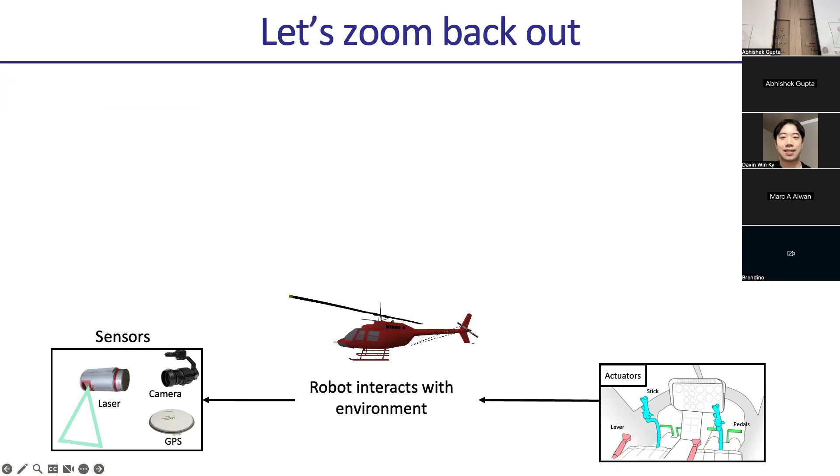Okay, so if you go back to our lecture 2, right? We want a robot that interacts with the environment to go from sensors to actuators. We had this loop where we had a world model. State estimation tells you where you are, so it goes into your world model. And then you have planning, which tells you a good global path. And you have control, which tells you how to follow the path. And so we went kind of topsy-turvy, we did state estimation, we did control, but now we're going to do planning.

Okay? And so planning, as opposed to control, is really about finding a global path through the space. So if you're a helicopter, it tells you the path you need to follow to get to your target, but it doesn't tell you the lowest level controls. That's what controls do. Right? And so controls assume that you have a path. Planning gives you that path. Okay? And so we're going to focus on planning for the next few lectures.

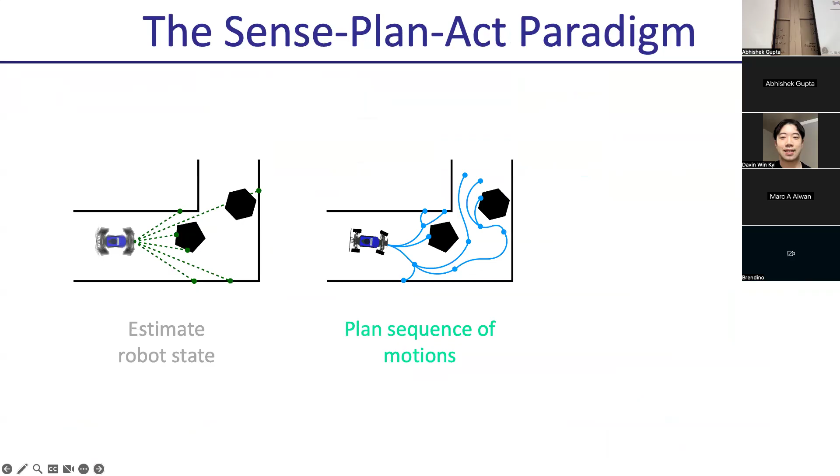And so planning kind of fits nicely into the sense-plan-act paradigm. You have sensing, which tells you where you are. You have planning, which tells you how to avoid your obstacles. Often planning is about avoiding obstacles while minimizing costs. And then control kind of keeps you on track. So control is really about stabilization. Planning is really about finding a collision-free path through high-dimensional space. And state estimation is about managing uncertainty. Okay? And so we talked about state estimation, we talked about control, and now we're going to talk about planning.

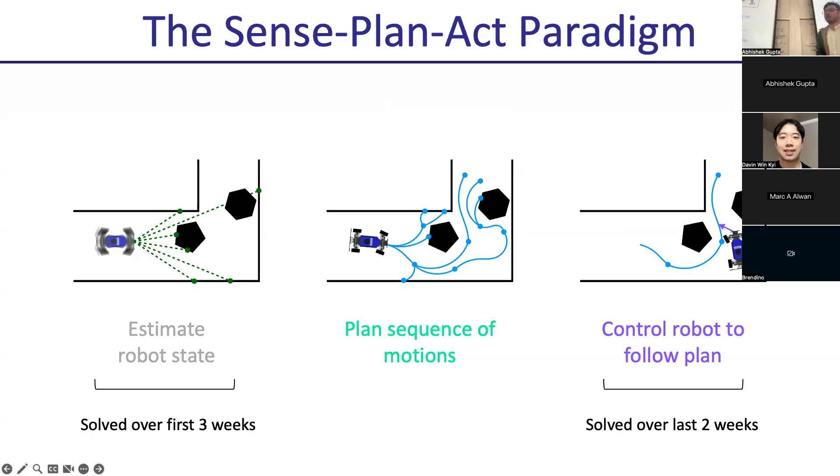Okay. So let's think about this example of flying from Seattle to LA. If I'm going to fly from Seattle to LA, I'm going to start by getting to the terminal, boarding an airplane, getting off the airplane, taking an Uber or whatever, right? But then I'm going to break those down into smaller steps, right? So I'm going to plan getting to the terminal as getting onto the I-5 and then driving down and then getting off on the exit and so on. And similarly, you want to plan your route in the airport, plan your route once you're off the plane. Right?

So there's different levels of planning that you do. The highest level planning is in terms of task planning. I want to get to the airport. I want to get on my flight, get off the flight. Then within each of those steps, you kind of break it down into smaller parts.

And then you kind of keep breaking those down further and further until you finally start asking the question, how do I actually take the first step of this, which is getting out of my house? And so in planning terms, this is like a hierarchical planning scheme. So you have a highest level plan, and then you break that down into smaller and smaller steps until you're planning about motion.

So I'm thinking about, how do I get out of my house? It's like, how do I move my joints and limbs until me as a human is able to get out of my house? And so I'd argue that the top few layers are kind of what you call task planning, and the bottom layer is really what you call motion planning. So it's like, how do you plan your motion to get you and your suitcase out of the house while avoiding colliding with random stuff?

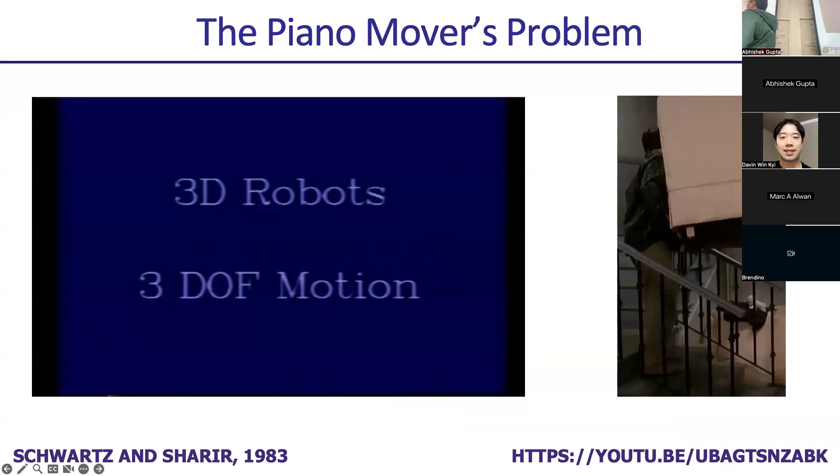This motion planning is often called the piano movers problem. Here's an example from the 80s. You can see this is like a maze kind of thing where you're trying to extract an object from somewhere. What they're trying to do is place furniture inside a room, but you can only translate and rotate the furniture, and you cannot collide with anything else.

And so the problem is hard because you can't teleport, you can't fly over the objects. You have to consider their collisions with things, and account for that while planning. For instance, some things might be too tight to get through, so you have to plan for how they collide with other objects. As the number of objects and number of degrees of freedom goes up, that gets harder and harder. This is the simplest motion planning example, and then it gets harder and harder.

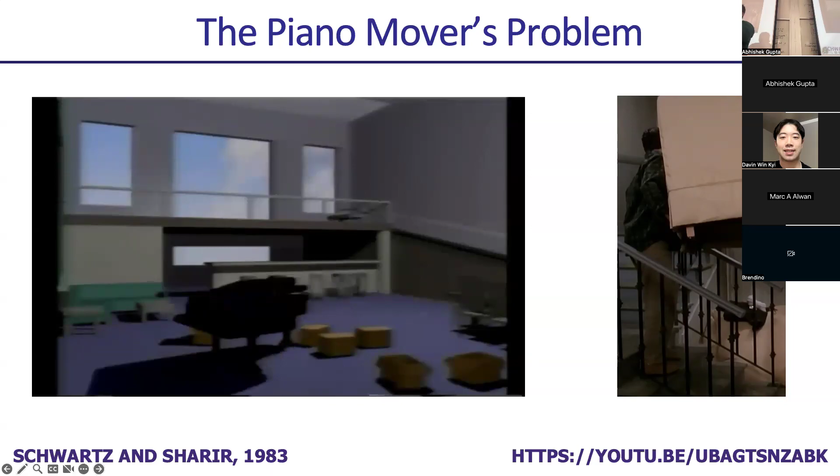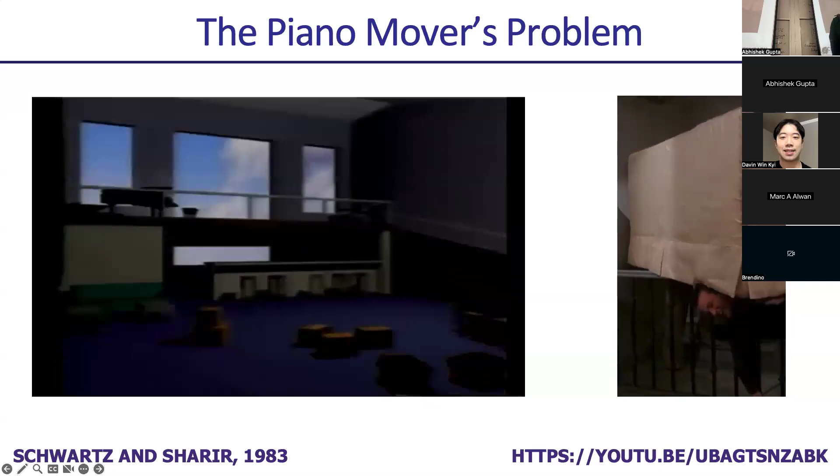You can show that it's harder than, what you call, PSPACE-hard, which is harder than NP, extremely hard. Also shown in Friends. I don't know if any of you watch Friends, but there's this scene where Ross is pivoting his sofa up the stairs, and that's essentially the piano movers problem in action. And I thought that was cool.

But basically, most motion planning problems are generalizations of this piano moving problem, where you're trying to navigate through free space with a constrained system while not colliding with anything, right? So you have to account for the constraints of your system. You can't teleport, you can't fly, but you have to avoid collisions with things in a really tight constrained space. Okay. And the piano mover problem seems easy, right?

But when you go to problems that you actually care about, like this is a Honda humanoid, this is one on the International Space Station, right? You're trying to plan motion to, for instance, pick up a table or plan motion to get through space while holding onto a guardrail with a really high degree of freedom system. You have to do it fast enough and on low compute systems, and that becomes really hard, right? And so,

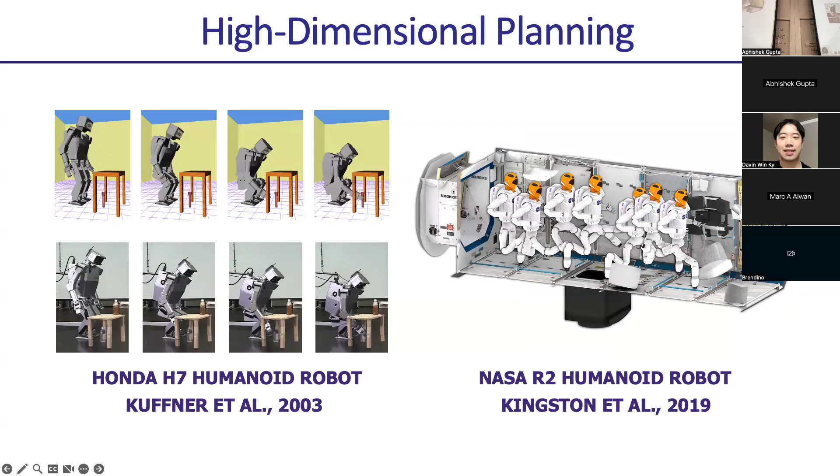If you look at any of these systems in space, they're not running NVIDIA GPUs, right? They're running Pentium 3s or 4s or whatever. And so you have to be compute efficient while dealing with really, really high dimensional systems and dealing with lots of constraints, right? If you didn't deal with the constraints, this robot would just fly off or it breaks up. Okay? And so you have to be highly reliable, pretty quick, and deal with high dimensional systems. And so this is kind of the general problem of motion planning.

If you ever see problems like this, with a bimanual arm, you'll see that the arms have to avoid each other. You're in a tight space, you have to avoid each other while moving fast and doing motion. So that's up on the right. We have whole body planning, which is up on the left, where you're trying to move the whole humanoid at once. And this is more conventional, most factories will deploy motion planning systems to get quickly from one point to another when there's obstacles in your system. Right? And so most motion planning problems that you consider are about getting from point A to point B while avoiding obstacles and obeying the constraints of your system. Right? Okay.

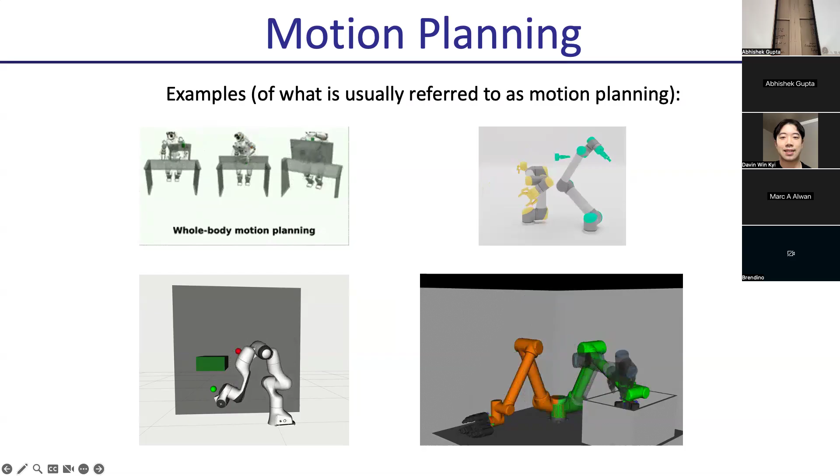What makes this even harder is when you go from these kinds of problems that you can compute offline. A lot of these problems you can compute offline. You compute a path to go from here to here. You execute the path with a controller. But what makes this harder is when you have to do real-time planning. You're a robot arm planning to move from point A to point B. Suddenly a human comes in your way. Your plan has to be different. You have to do that on the fly and you have to be safe, right? So any safe system needs you to be able to do real-time replanning. And that's what makes this problem really hard.

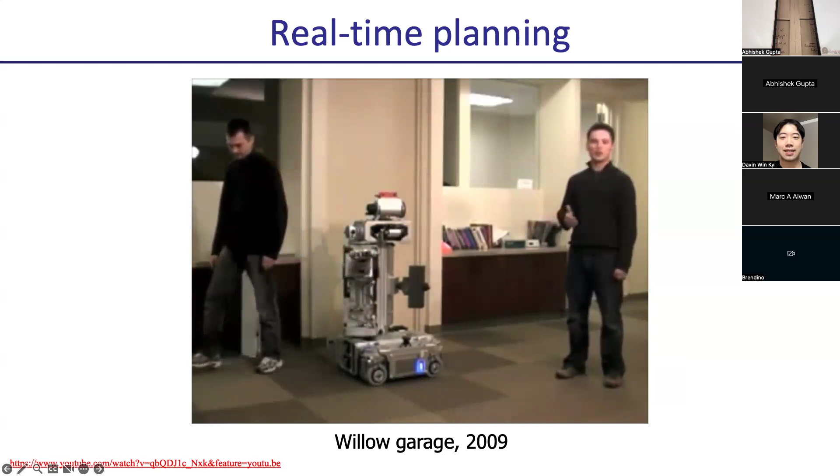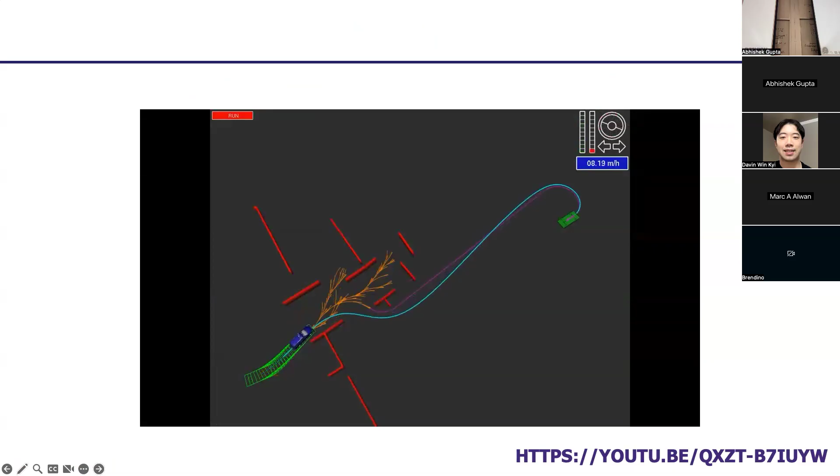This is an example from Willow Garage, which makes the PR1 and PR2 robot, but you can see that people will stick their hand in the middle and the robot has to get around. Another example is from autonomous driving systems where the map is not fully known. You're building the map on the fly, and as you're building the map, your plan changes. You realize that I can't go that way. I have to change my plan. And so you have to be able to really quickly incorporate new information into motion planning methods.

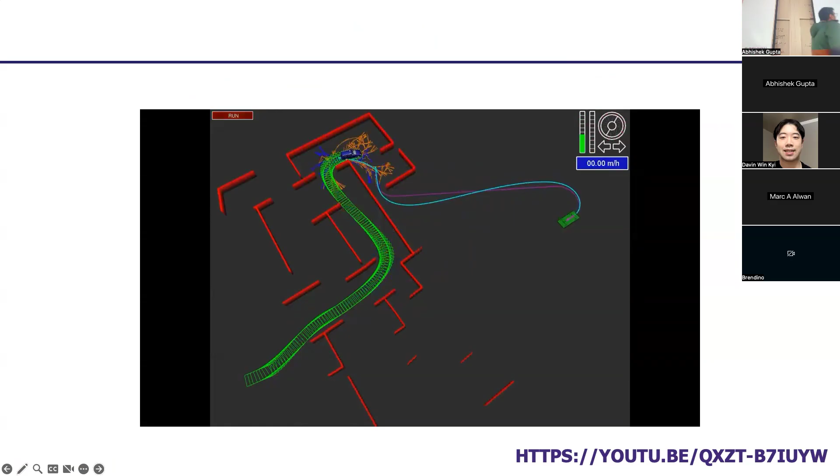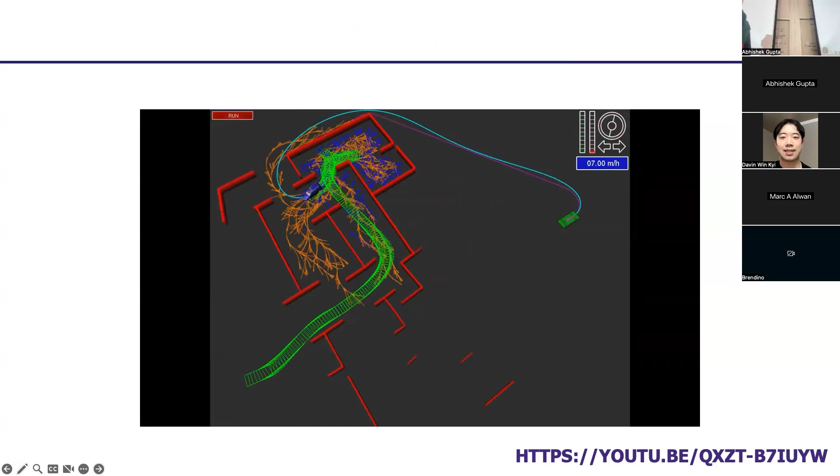As opposed to things like reinforcement learning, which you could take 50 hours to train offline, planning really has to be fast and really has to be real time, right? If you're driving a car around, you need to be able to make new decisions in real time or close to real time.

Okay. The other nice thing about motion planning methods is that they're often very universal, in the sense that there's a single algorithm that works across many systems. If you look at the state-of-the-art motion planning algorithms, some of them are very old. A lot of them are the same algorithm, just applied to different systems. You just change the model, but it's the same algorithm.

Whereas if you look at other fields, often you have per-problem solutions, and motion planning algorithms are beautiful because they're basically search methods that are scaled up to continuous spaces, but the same method works across lots and lots of different forms.

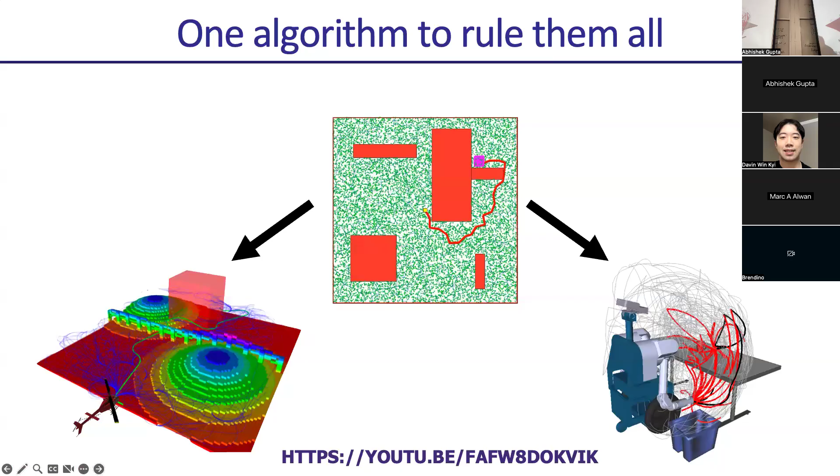Another nice thing is you can prove things about them. You can say that it's going to converge, or you can say that it's going to be this suboptimal, or you can say things like, there's these algorithms called anytime algorithms where you can show that they'll continue to get better over time, right? And so it's a really beautiful field of work.

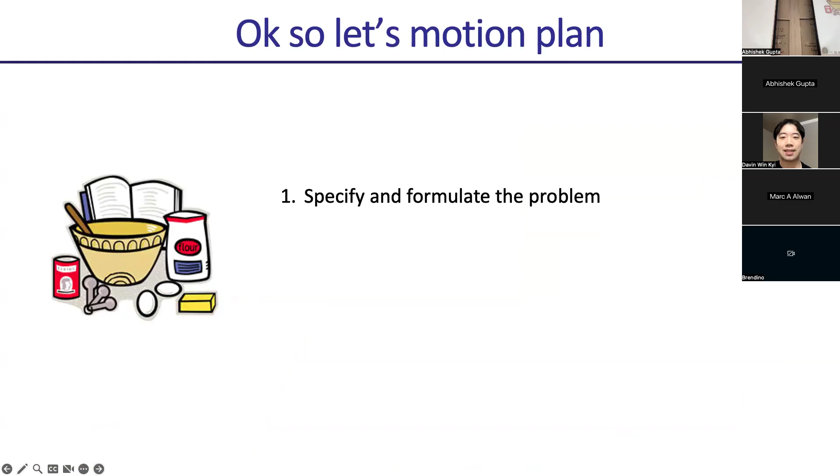Right? But we have to solve it, right? So we have to figure out how to motion plan. And so we're going to try to take this step by step. We'll start by specifying and formulating the problem. We'll then think about what makes this problem actually hard. Let's try to visualize the problem difficulty a bit more. And then let's try to think about solutions, right?

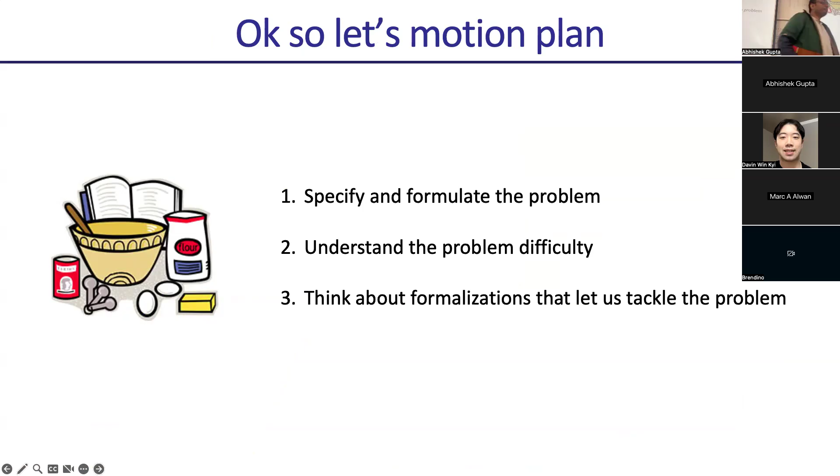So whenever I think of a research problem, I want to start by understanding what the problem is, understanding which cases make it hard, and then we can think about approximations that are tractable. Okay? And so that's going to be the structure of our lecture today. We'll start by formalizing what the problem is. We'll talk about what makes it hard, mostly through some visualizations and examples. And then we'll take a start at solving it. Okay, so let's start by specifying the problem.

Now, when we're specifying the problem, we need to specify a representation of our problem that can work across many different cases. So we said we wanted it to work for a humanoid, for an arm, for a snake robot, for a piano moving in space. You want a generalizable representation that we can use across lots of problems.

So for instance, you have a problem of a translating triangle, kind of like your piano. You have a problem with a 2D planar arm moving through space while avoiding obstacles. You have a problem like a race car, like you guys are doing, or a robot arm, like we have in the lab. And all of them have to have some shared formalism that we can use across them, right? They seem like super different systems. And so what we're going to try and do is define a formalism that we can use across all of these platforms.

And so the key idea we're going to talk about is something called the configuration space, often known as C, right? So the configuration space, or the C space, is a manifold that contains the set of different transformations that are achievable by a robot. Essentially what that means is, if you have a robot arm, the configuration space for that robot arm is the set of all joint positions that that robot arm can take. Or if it's a race car, it's going to be your X and Y and theta.

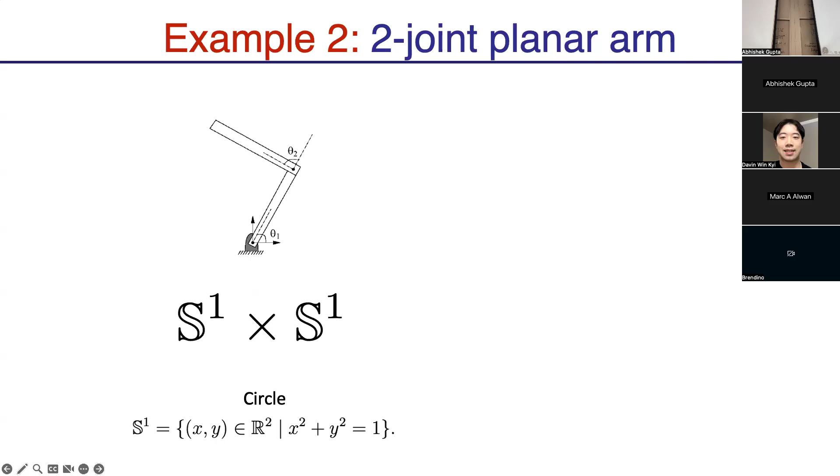Good question. But viewed graphically, you can think of it as a theta 1, theta 2 space, but it has wraparound. Right, because it's angles, it wraps around. And so it kind of looks more like a torus. Right, so you have theta 1 goes this way, and theta 2, for each theta 1, you can have a theta 2, which goes this way. If you want to visualize the configuration space here, it looks something like that.

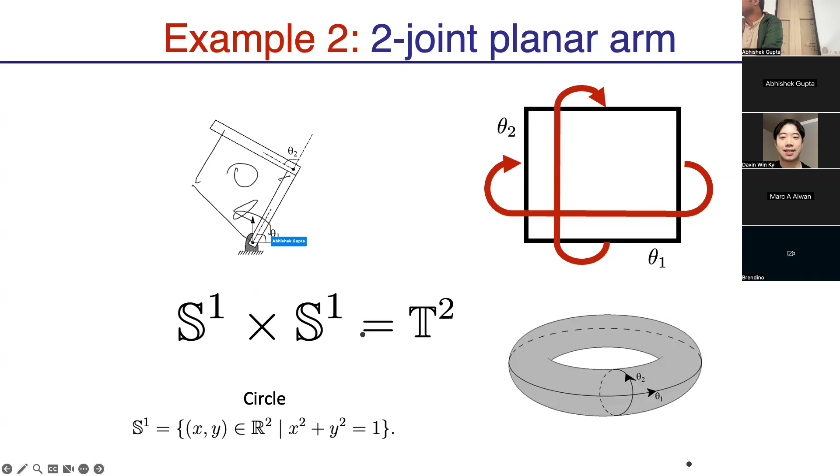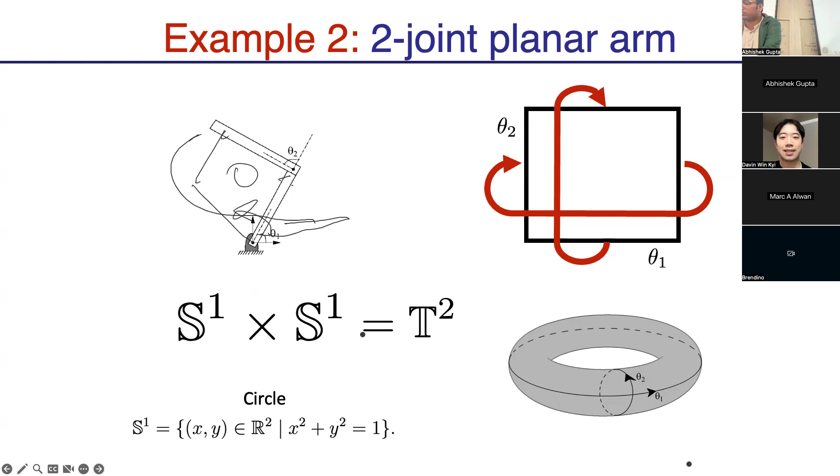And so what's going to make this tricky is when you have an obstacle sitting right there. So if I want to get to, for instance, this angle, I cannot just send my robot this way. It's going to hit the obstacle, right? And so what I have to do is move this thing over like this, and then get through and then flatten out. Yeah. So in order to do that, you would model what parts of the state would have the arm colliding. Exactly. And that's going to be tricky, right? So we'll talk about that.

The example that you guys care about is the race car, right? So in the race car, you have X, Y, theta. So you have X and Y, which is in R space, and S1, which is in your angle space. And so this is a group that you often call the special Euclidean group, or SE2, right? And so SE2 is going to be X, Y, theta in the plane. The car's not going to fly, and so it'll stay in the plane.

And so you can have a bunch of different robots. Each of them will have their own configuration space. But when we think of these planning algorithms, we're just going to generically operate on the configuration space under generic assumptions. And then you can instantiate them with each of these specific robots. So for instance, you might have a mobile robot translating, R2. A mobile robot translating and rotating like your race car, that's SE2. You can have a spacecraft which can move in 3D and have all sorts of rotations. That's SE3. So we don't have to go through these examples, but they're all just different instances of a configuration space.

Okay. Now, as Ruin was alluding to, the tricky part is when you have obstacles, and we're trying to find collision-free paths through space. And so the way that obstacles are specified, yes.

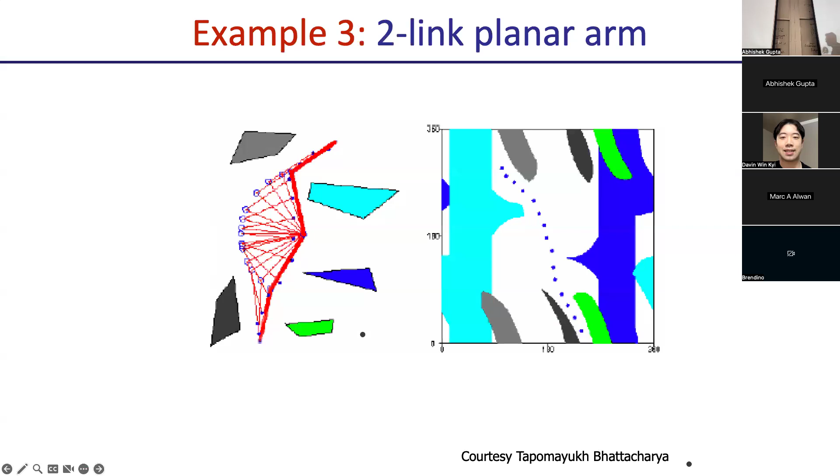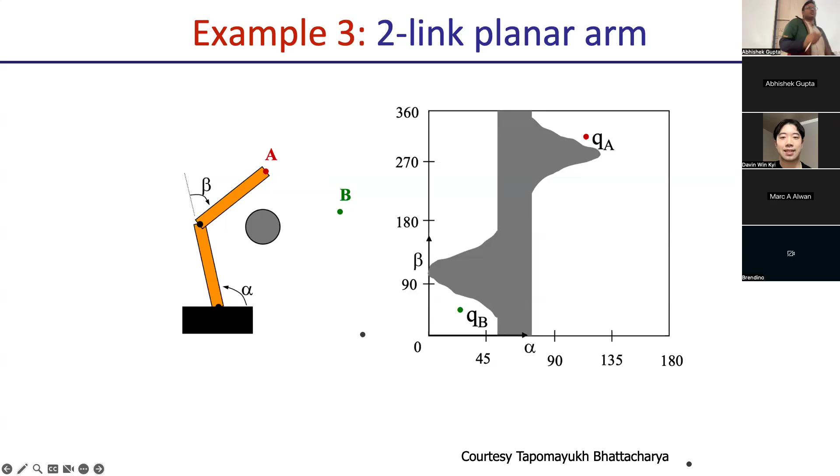Okay. So the general problem we're going to try and solve is defined something like this. We're going to say that we have a workspace, which is either R2 or R3. We have an obstacle region. It doesn't have to be a single region; it can be a collection of regions. We're going to have a robot, which is defined by some A function, which maps the configuration into an area. You're going to have the configuration space. You're going to have an initial configuration, let's call it QI. You're going to have a goal configuration.

Let's call it QG. And your goal in motion planning is to compute a continuous path through the free part of configuration space, where it starts at QI and gets to QG. And so you have to basically solve this search problem where you're trying to find a path that gets you from QI to QG while staying in the collision-free part of configuration space. That's the problem. And sometimes you'll have a cost, like you want to get there while saving fuel, or while obeying other constraints, but not always. Often you just try to find the shortest path.

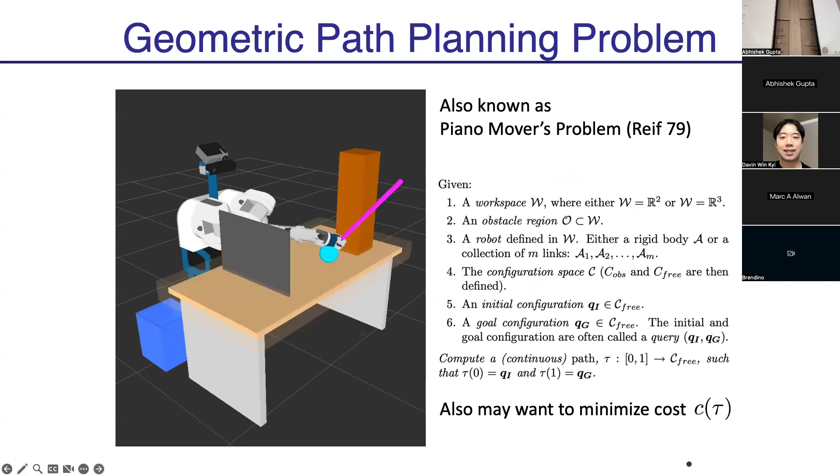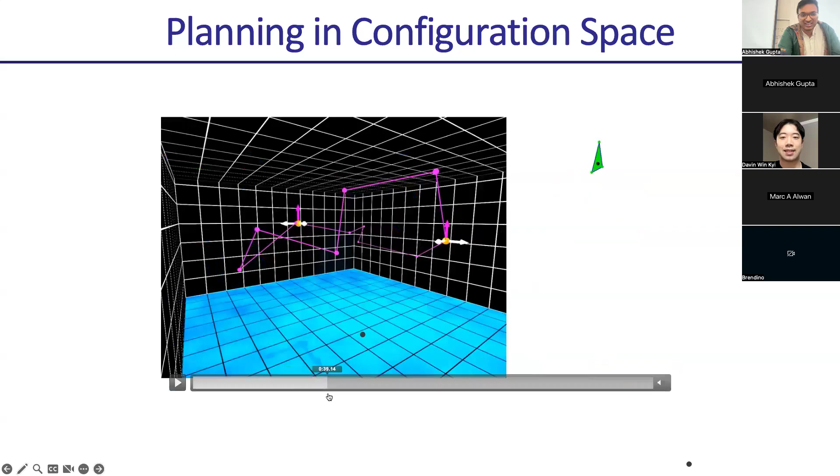So you can see that it's getting through space, navigating through this nasty non-convex space. It seems pretty simple, but when you start mapping these obstacles into the space, it becomes really, really nasty, even for a simple robot. And so if you look at the motion it has to plan, it can't magically go through things. It has to move and adjust and move and adjust and move and adjust.

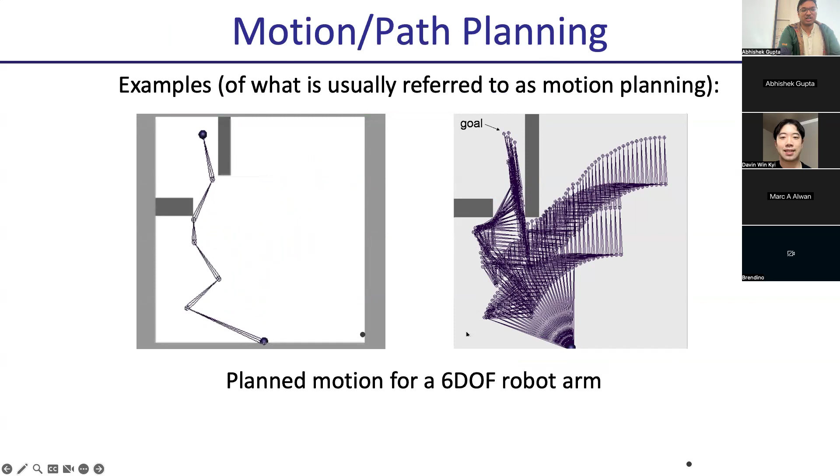Right? Similarly, if you're trying to get this robot over here, you have to do strange things like that to get there, right? So this is the result of a motion planning algorithm. Okay, so does everyone buy that the problem is hard?

Yes? Good. Just kind of curious, what if we have something like a soft robot that has a ton of degrees of freedom? Yeah. So often in those cases, building a model is even hard, and the number of degrees of freedom is really high. You'll try to use approximations, like it moves like a lower order rigid body system, or you'll try to do some model-free algorithm like reinforcement learning. That is a tough problem.

Okay, so in certain cases, you can solve the problem using this technique called visibility graphs. Visibility graphs are basically saying when you have polyhedral obstacles and polygon robots, you can construct a visibility graph, which is which corners are visible from which other corners. You can plan a path through those corners, and you can prove that it's going to be close to optimal in many cases.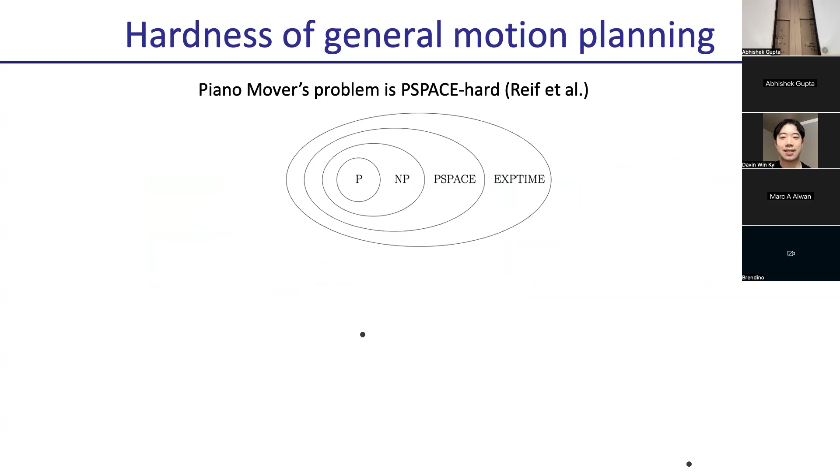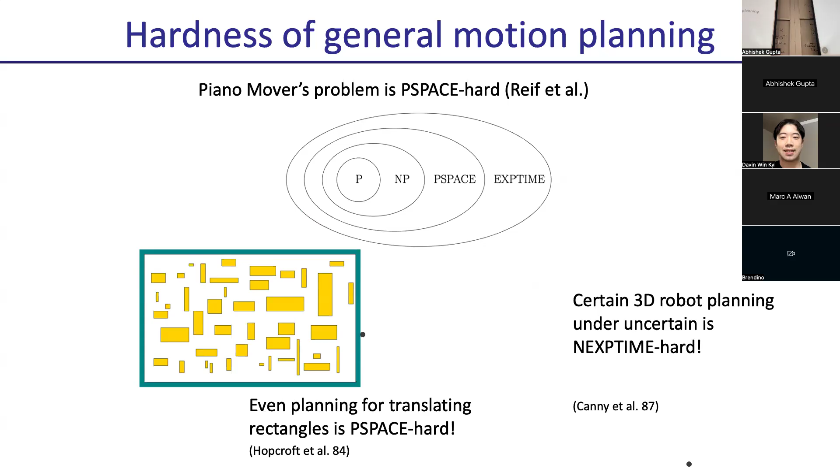But in general, the piano movers problem or the motion planning problem is what's called PSPACE-hard. You have P, you have NP, then you have PSPACE, and you have exponential, right? You can show that even for translating rectangles, it's a PSPACE-hard problem. And if you consider things with uncertainty, etc., it's a NEXPTIME-hard problem. So you can prove that it's hard, but it doesn't mean it's hopeless. We're going to find good approximations to make this happen.

But what makes it hard is that you're dealing with this complex non-convex space because your obstacles have gone into configuration space, and you're dealing with this continuous high dimensional space. So like Jordan was saying, you have a soft robot or something with a ton of degrees of freedom. How do you deal with that high dimensional continuous space? It scales poorly with the dimensionality, but we're going to find some good approximations. A planning problem basically takes in your workspace obstacle regions, your configuration space, your start and goal configurations, and gives you a collision-free path, which might also optimize costs. That's going to be our problem.